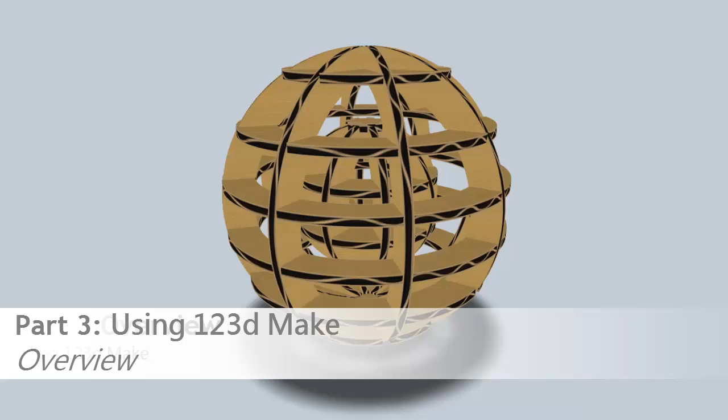In this section, we'll be importing our model into 123D Make to turn it into a cool, lightweight, cardboard egg drop canister. In order to accomplish this, we'll need to measure our model's dimensions, since the transfer from 123D Design doesn't always keep the correct dimensions. After we import the file, we'll have to type in the correct dimensions and select the size of cardboard we'll be using.

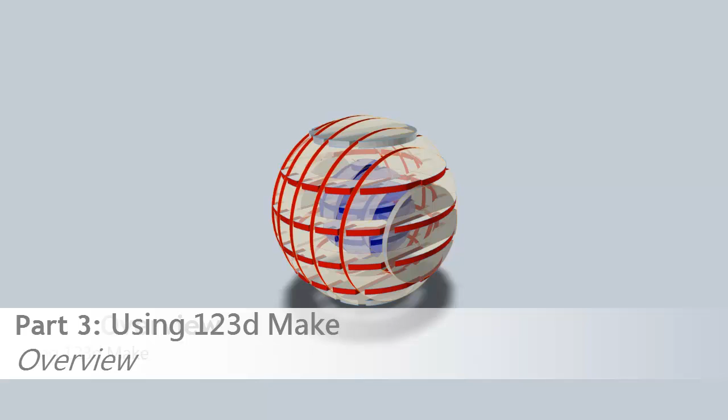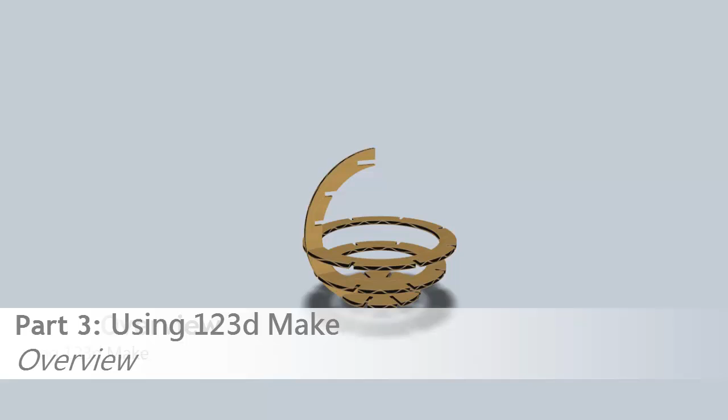Then we get to select the type of construction technique for this model. We'll probably end up using the radial slice construction technique. From there, we can export our file as a PDF or other two-dimensional formats that can be read and used by laser cutters and printers. After that, all you need to do is either print out the templates that you cut out of cardboard, or if you have access to a laser cutter, laser cut out your parts directly from the cardboard. Then simply assemble your model according to the assembly steps automatically generated in 123D Make.

Alright, let's now import our STL. We select the import button, and then we navigate to our STL file we saved in the last section. Depending on the size of the STL file, this import could take a while.

Now we need to select the size of sheets we'll be printing on, or the size of sheets your laser cutter can use. I'll select 8.5 by 14 as this is the maximum size my printer can print.

The third dimension, the 0.1772 inches, that's the thickness of the cardboard. If you're going to use thicker or thinner cardboard, make sure to create a custom profile and enter in its own dimensions.

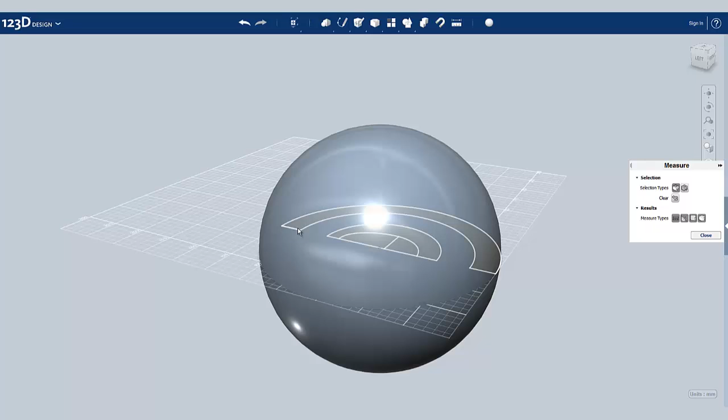To do that, we'll go back to 123D Design and select the Measure tool. With the Measure tool, we can measure the diameter. I'll use the sketch geometry, and I'll click on one end, and then I'll click on the other. According to the Measure tool, our diameter is about 147 millimeters. I'll go ahead and write that down now.

In 123D Make now, we need to enter in that dimension. So I'm going to enter in 147 millimeters and push enter. This also can take a second depending on the size of the file.

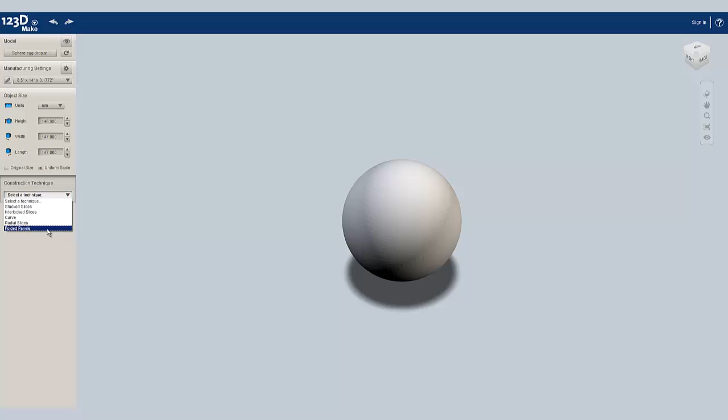Alright, next we get to select the construction technique. There's a lot of different construction techniques, but I think radial slices will work the best for this one. If you haven't explored them already, I suggest taking a minute to just go through all the options and see which one you think would work best.

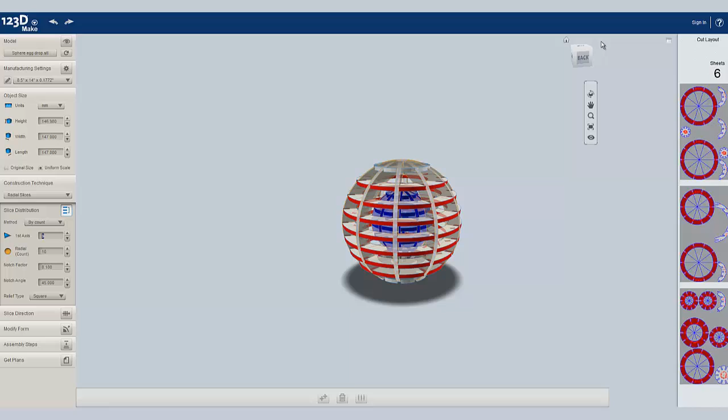Now that we have a construction technique selected, we can edit the number of layers that our model will be made out of. It lags a little bit with this window open, so I'll close that. There we go, now it'll load faster when I change these numbers. I honestly think I don't need that many for the horizontal supports, so I'll probably do 5 or maybe 6. That looks pretty good.

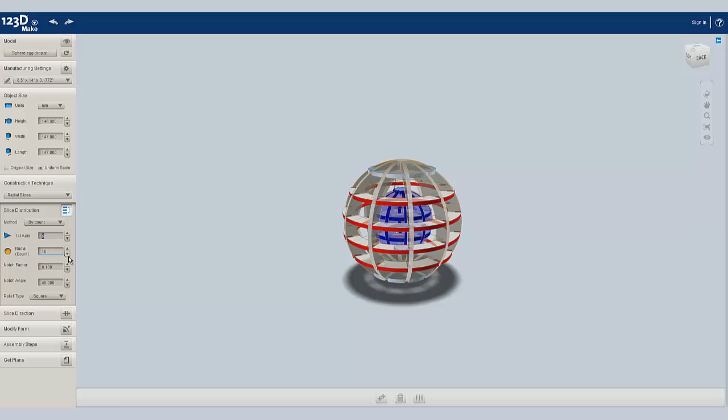Next, I can edit the radial count, the number of radial supports. I'll lower it a little bit to make it a little simpler and easier to assemble.

The next step in 123D Make is the Slice Direction step. This step lets you determine where the radial axis is pointing for your slices. You can edit it by simply clicking and dragging this blue arrow here. I like it where it was, so I'm just going to go ahead and place it back.

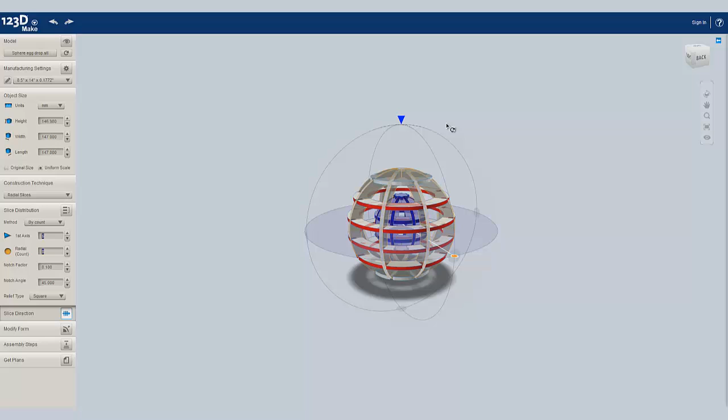The next step is the Modify Form step. This is useful if you're experiencing issues with your models, such as if the model is too thin, or if you need to make it hollow, things like that. The three options are hollow, thicken, and shrink wrap. All three of these helpful options will modify your actual model to help slice it in 123D Make. We don't need any of these options because our model is looking pretty good right now.

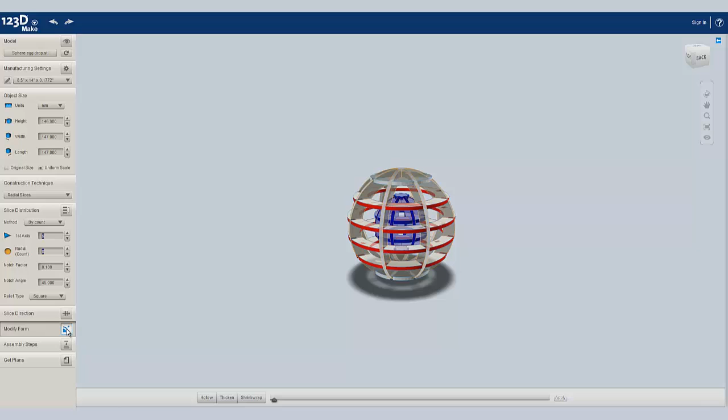Alright, the next step is the assembly steps. In this step, 123D Make will show you how to assemble your model. If you start from the beginning just by clicking this over and pulling it over there, you can then click on the next part button.

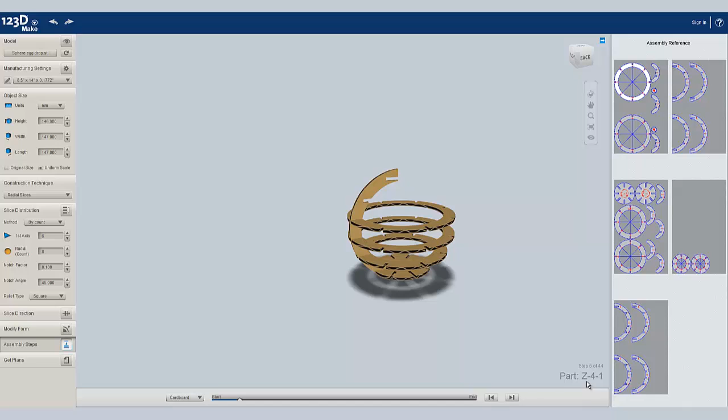Notice how it highlights the piece you are on the sheet preview on the right side of your screen. Also notice that the part is labeled, and during the assembly steps, it actually tells you what part you need to add.

The next step in 123D Make is the Get Plans step. You can tell Make to export the plans as either a PDF, an EPS, or a DXF file. All of these files are useful in their own way. If you're planning on printing out these templates, I would recommend the PDF format. If you're going to use a laser cutter, check with the operator to see what types of file formats you should save it as.

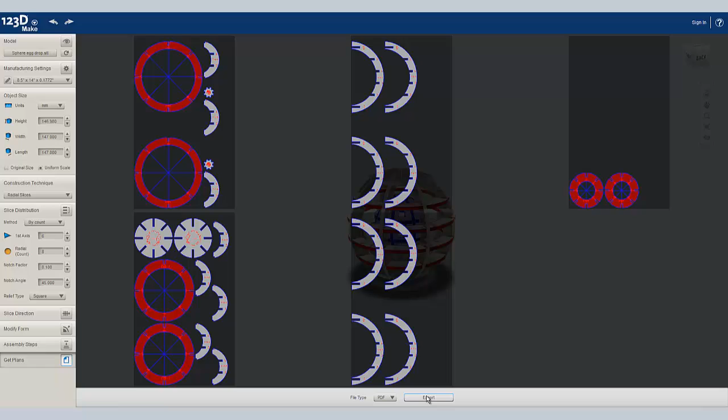To export this file, you'll actually have to log into an account. I'll use my Autodesk 123D account. But if you haven't signed up for one yet, you can also sign in with a Gmail, a Windows account, Facebook, and all the other listed acceptable accounts at the bottom.

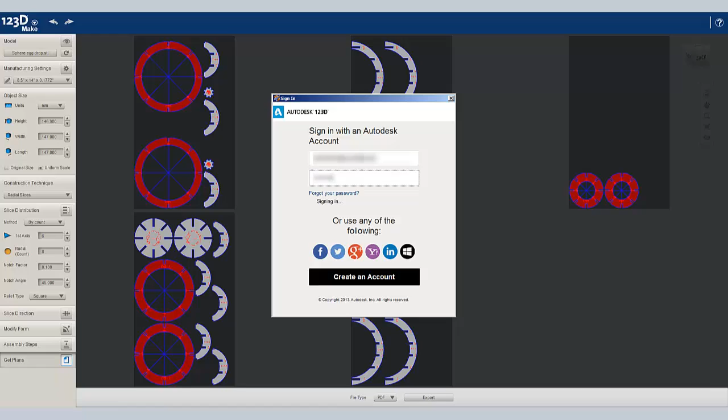Now all that remains is printing out the templates, cutting out the cardboard, and assembling the model. Once more, 123D Make can help you out with the assembly steps. Now that we understand the basic steps to create an egg drop canister, I would like to show you a more advanced egg drop canister that takes advantage of more options in 123D Make in the next video.